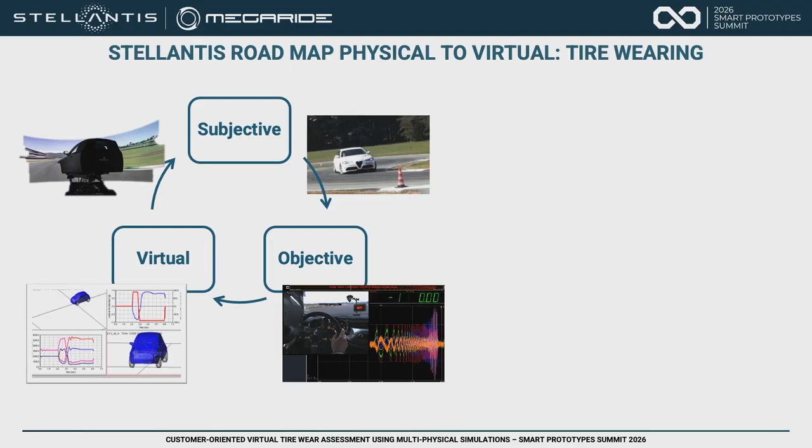And just yesterday, Andrea presented the integration of the hardware in the loop of the shock absorber on the simulator that, as far as we know, is the first worldwide application of this technology. And we are proceeding in this direction. What we are presenting today is something that apparently can seem very basic, but in reality, it isn't. We are talking regarding tire wear.

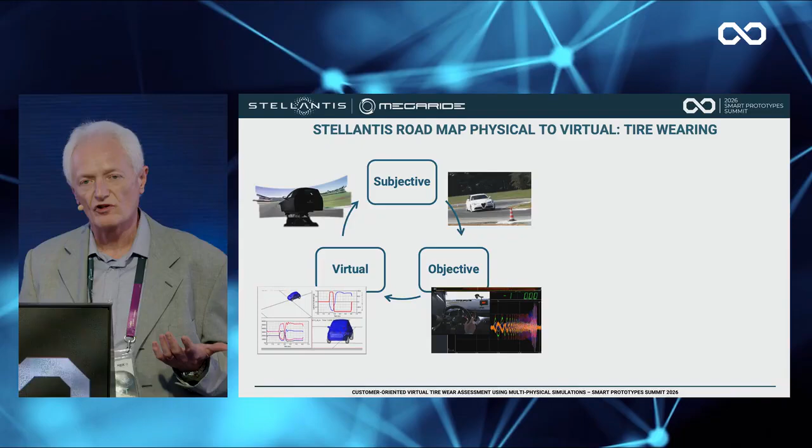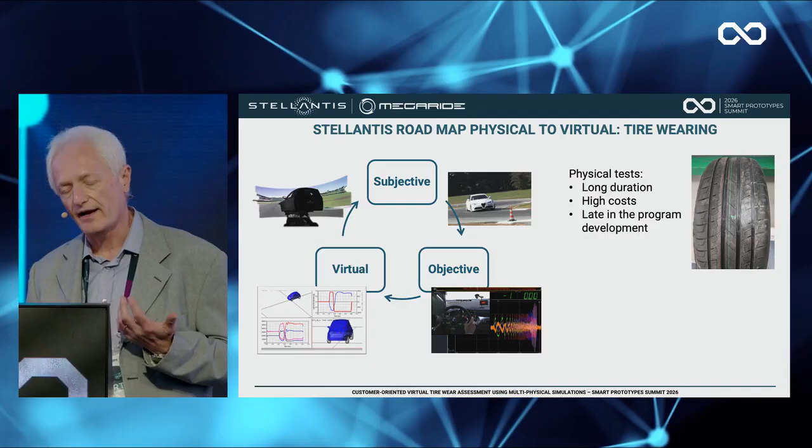The tire wear approach in Stellantis, but also in many OEMs, is to delegate a lot to the supplier, defining the target, and making a final check at the end of the development. This usually works, but we have had some issues recently, especially with some newcomer suppliers. And so we are evaluating changing something in order to introduce intermediate checks. But unfortunately, it's not possible to use what we do at the end in intermediate checks because it has a long duration, has high cost, and then it becomes complex.

Then what we are trying to do, what we are investigating, is to use something that is simpler, but lets us make an early prediction of the tire wear using a smart procedure, even if we are conscious that this has a reasonable precision. What we mean as reasonable, just to give an idea, is something around 10–15% of relative precision with respect to a reference tire, so in a relative way.

We started an investigation with several potential partners, and we identified in MegaRide an approach that potentially can fit our expectations very well. And then we started a proof of concept project with Flavio's team.

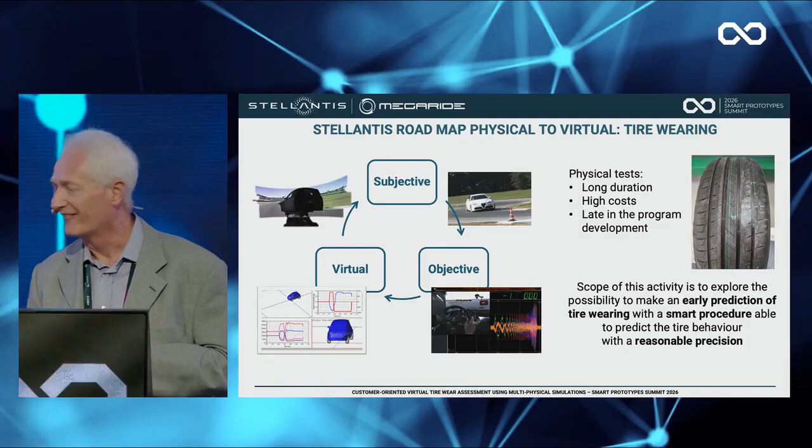Just a few words about who we are. Stellantis does not need a specific introduction. Maybe we do. We are, first of all, a research group at the University of Naples. We have worked for about 15 years in vehicle dynamics. In 2016, we founded our first company, MegaRide. Then we acquired a second one, and then a few other startups were born within the group. So now we are 4 companies. We involve about 60 people, with 18 PhDs funded within the companies.

And we were born with motorsport, so we work within 13 racing series with more than 35 racing teams. But we are expanding this kind of technological platform to OEMs and tire manufacturers, which nowadays use these kinds of methodologies. Today, we are going to introduce how we applied some of the tools we developed within this case study.

Our platform is called Ride Suite. It's a multi-physical and modular platform regarding tire simulations. It has a thermal module, ThermoRide, a multi-contact module, ThreeDeeRide, an advanced MF-EVO interaction module, and the wear module, the first commercial wear and degradation module, WeaRide. Each user can select which module he wants to use within his daily activities.

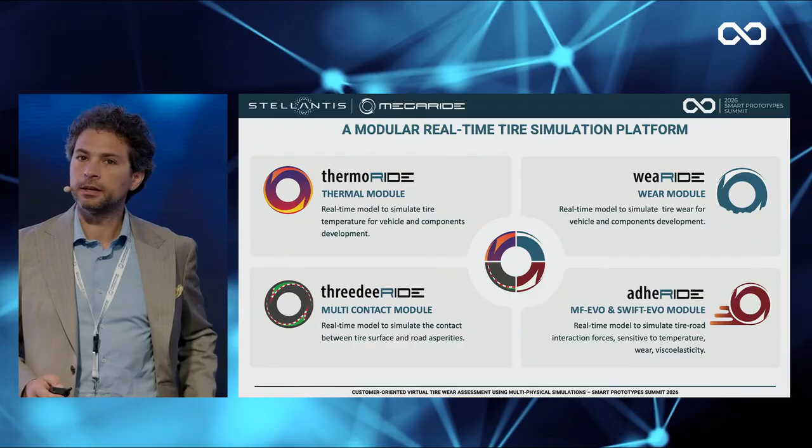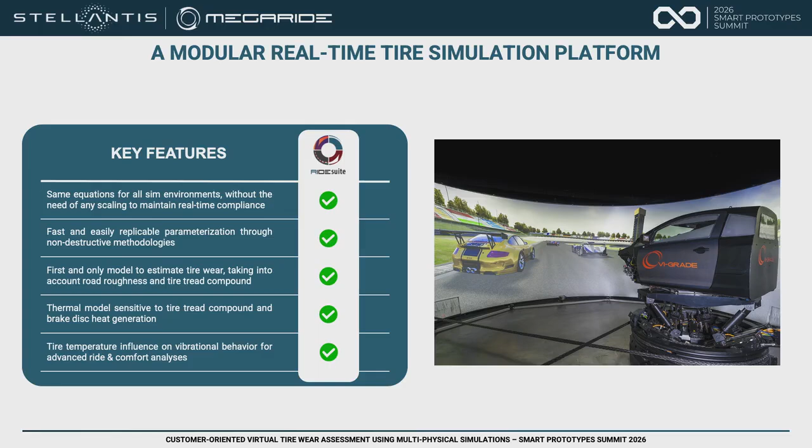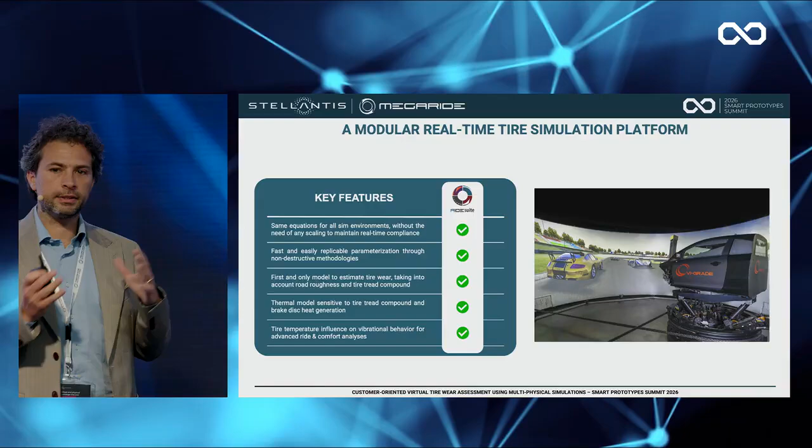The key feature and the peculiarity of our approach is that we want to be smart. We were born with motorsport. Our characteristic is that our models have to be parameterized and calibrated in a smart way. So we are perfectly fitting the event we are presenting today. And we want to be something different because with simple and non-destructive tests, you must be able to parameterize your own simulations with always the same analytical formulation within each of these models. And you can use them both in desktop and DIL applications.

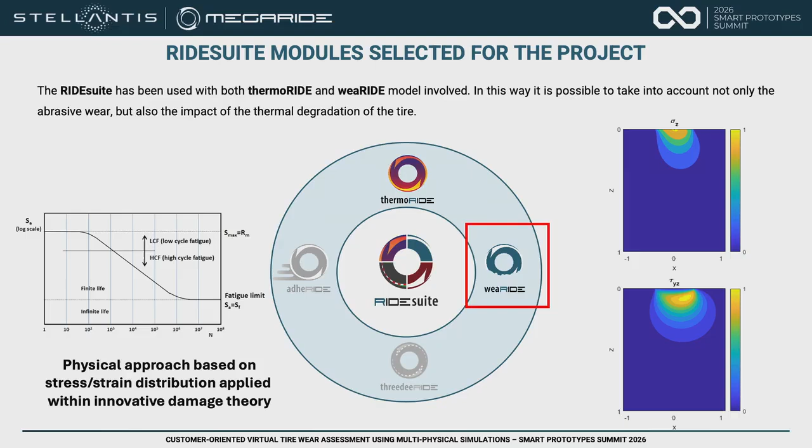Today, for this specific project, we will introduce a couple of modules we selected for this target: the thermal module, ThermoRide, and the wear module, WeaRide. This one, as said, is the first commercial wear and degradation tire model. It was awarded the Vehicle Dynamics International Award in 2024, and it's based on an advanced physical approach which is linked to the stress-strain distribution within the tread blocks linked to the damage theory. So we developed the stress-strain formulation within the tread block, and we apply this to the damage factor, which lap by lap and kilometer by kilometer accumulates the damage within the tire itself.

The key features of this model are that everything has to be parameterized with completely non-destructive testing. Road roughness plays a very deep role, as we know, in wear and degradation, and we have some proprietary applications to develop this kind of analysis.

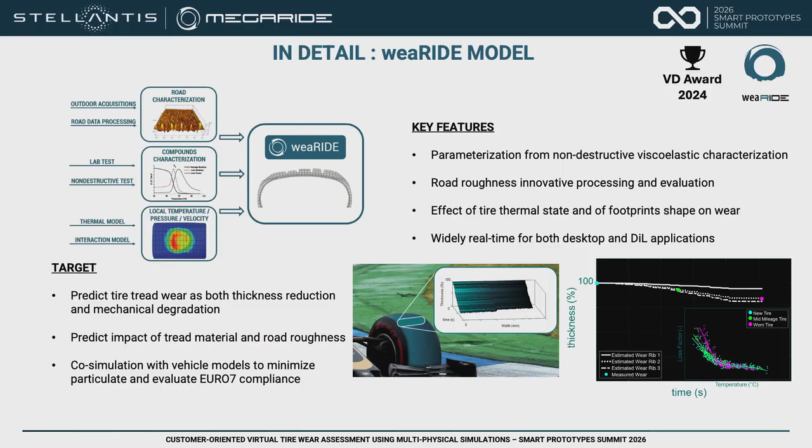And we see how thermal modulus and footprint shapes act within the wear and degradation effects and factors. The target of the model is to have a tire tread wear as applied both in the mechanical degradation and the progressive tread thickness reduction. And this model is linked to road roughness and thermal applications.

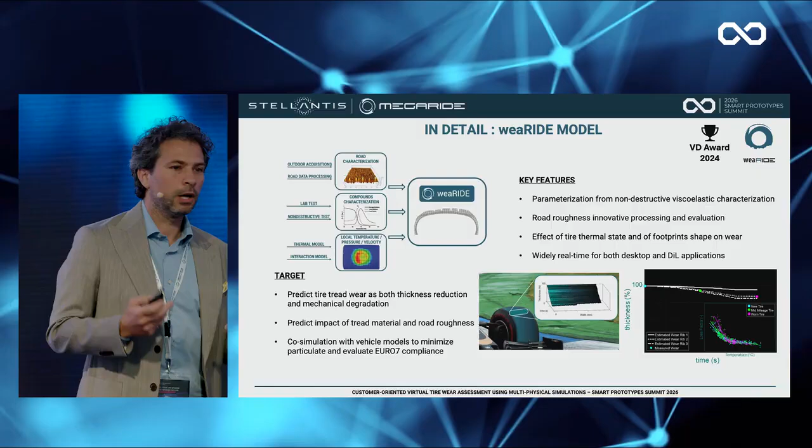This is, in our opinion, very important also with the paradigm shift which is coming in our lives linked to Euro 7 regulations. And so probably in a few months or years, we will be here talking about what Euro 7 is going to mean for all of us.

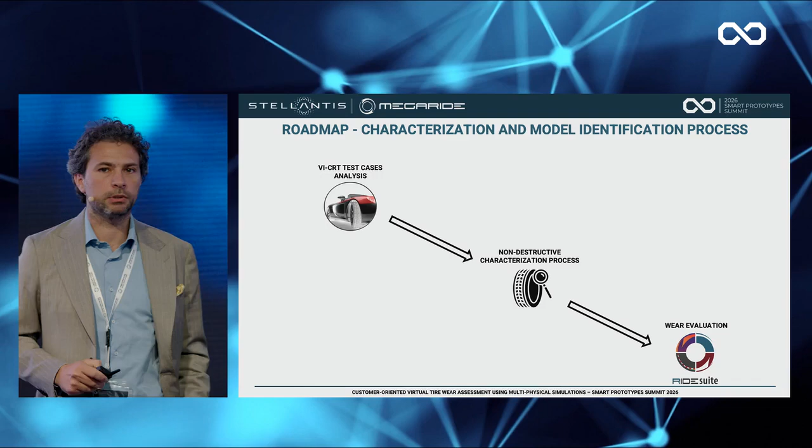The roadmap and the pipeline of the activity was based on VI-CarRealTime simulations at the beginning with a validated model by Stellantis. In parallel, our group developed the parameterization and the non-destructive test of the tire itself, and finally we ran our simulations with the RIDEsuite modules. Silvio will explain in a minute how they did the job on the vehicle model and on the road missions linked to the wear test.

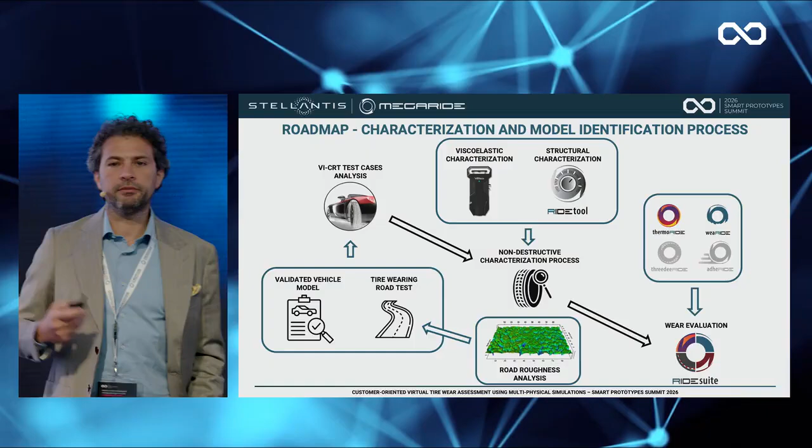We will explain how we developed the viscoelastic characterization and structural characterization of the tire and the road roughness analysis from the mission and the path the activity developed. And finally, we will run some of the results of the activity.

Please, Silvio. Sorry, back. Oh, yes.

Then let's start with the activity. Consider that all this activity started in December. So we are not talking of something done 1 year ago, but in a short time, really in a short time. First step was the definition of the test case, considering two boundary conditions. We wanted to select something that we had available. So we selected from the library of tests that we have performed recently on the road.

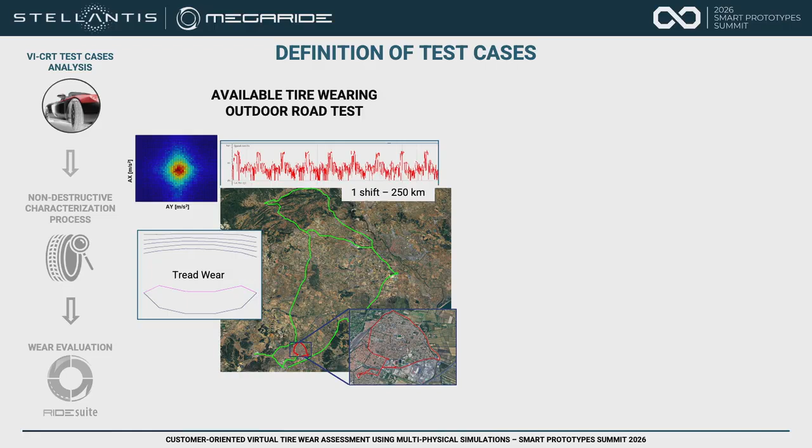Second condition, to have the availability of the model. This is not a big issue because we have a full coverage of the virtual model on our portfolio. Sometimes the problem is to have the measurement, because we measure the basic configuration of the vehicle and all the variants are in virtual. In this case, we preferred to have something that was also measured.

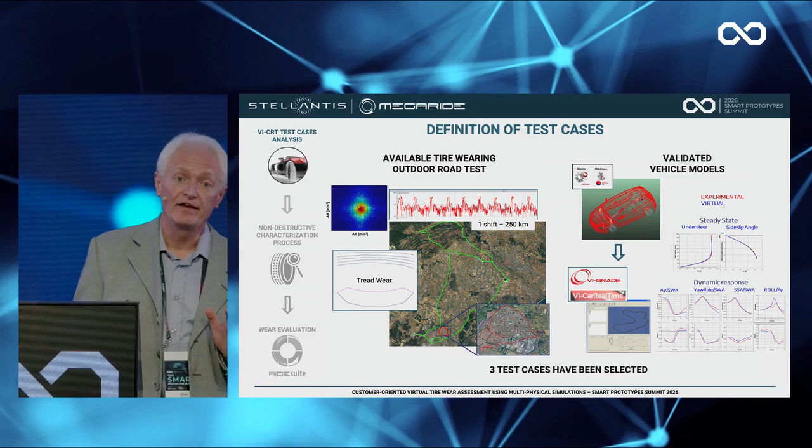Then the model that we had in multi-body environment was fully validated in static and dynamic condition, and we extracted the input to build the VI-CarRealTime model that we intend to use to run the simulation. In this way, we selected 3 test cases to apply the methodology.

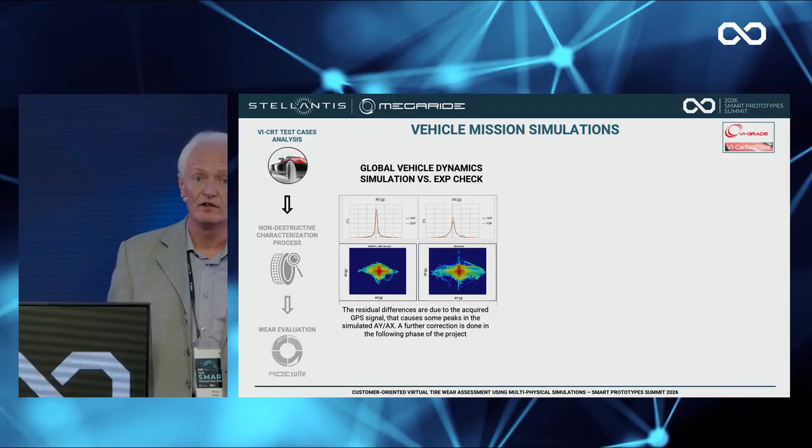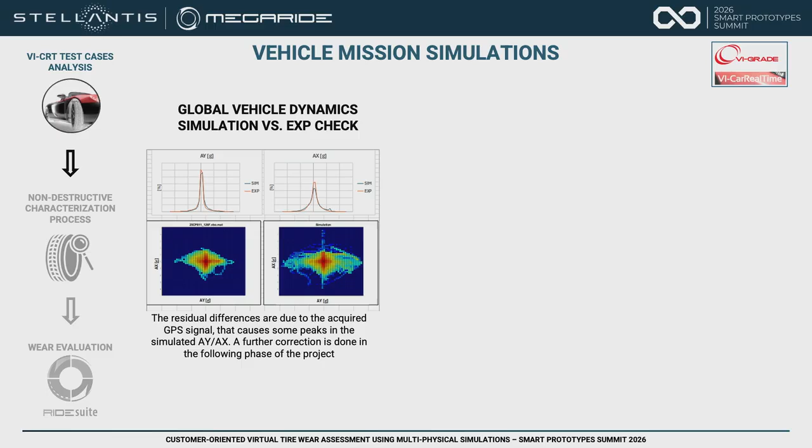First step was to make the simulation, using the real GPS data coming from the test to reproduce in virtual a 1 day driving cycle, a total of 250 kilometers, roughly. It worked quite well. We had just some issues related to GPS incoherence in some parts, and we needed to perform some correction, but in general, it was a good reproduction of the lateral and longitudinal acceleration, and this led to build the panel of information needed for the following step of the methodology.

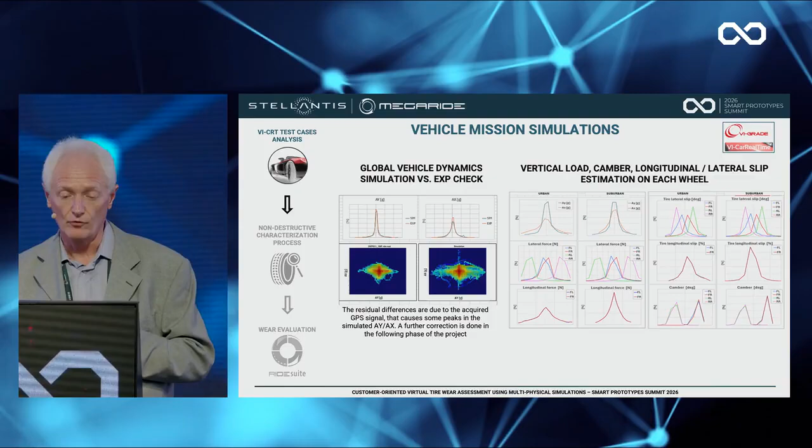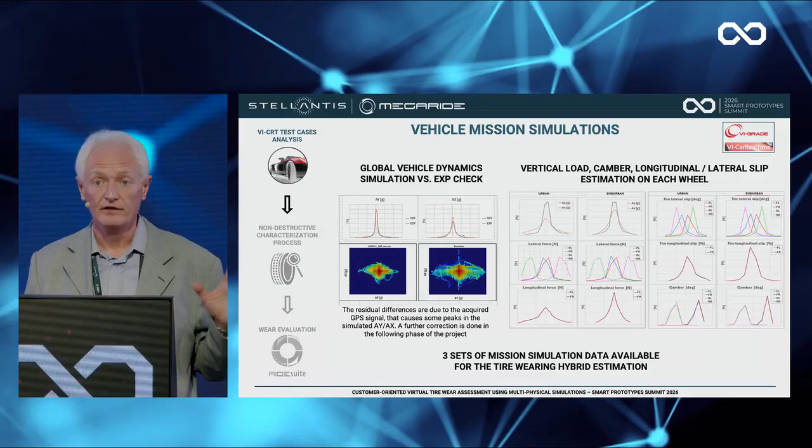Then vertical load, camber, longitudinal and lateral slip in each of the wheels. This was the set of data that we passed to start the tire wearing simulation. We are fully aware that in the future, these two phases can be merged, having the wearing simulation embedded in CarRealTime simulation. In this proof of concept, we decided to divide it into 2 parts, but this was just in order to speed up and divide the responsibility between our 2 companies.

Thanks. And so, in the meanwhile, our friends in Stellantis were developing the vehicle simulations. We were doing our job on the tire. The first thing to do was characterizing the viscoelasticity of the tread of the tire. We developed a few years ago for motorsport this technology called VESevo. You can have a demo at our booth in the expo area.

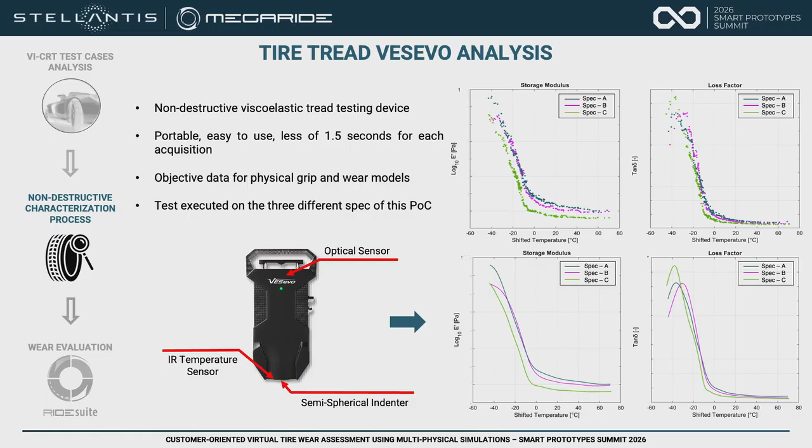It's a device which is able, in a very fast and non-destructive way, with a very simple test, to get the global assessment of the tire viscoelasticity characterization, which means the storage modulus and the loss factor. It's a sort of portable DMA machine.

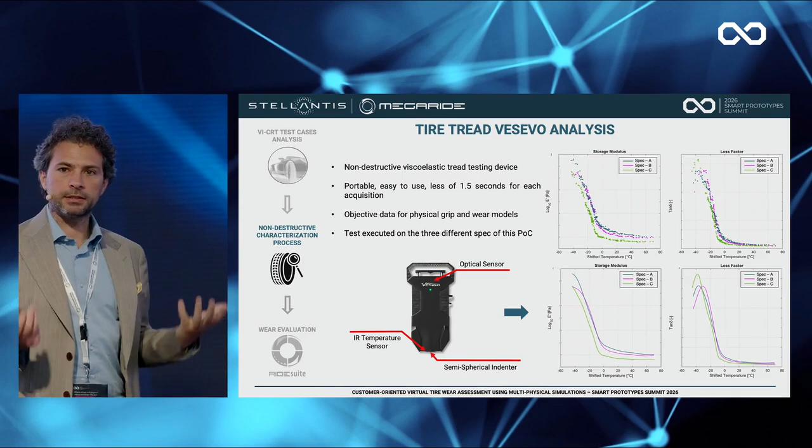For the activity, the 3 tire specs were characterized, and as you can see, spec A, B, and C provided very different and interesting characteristics in terms of the elastic and viscous behavior of the tires themselves. In parallel, we did the job regarding the tire footprints. So at our lab, we developed this, once again, non-destructive test concerning tires.

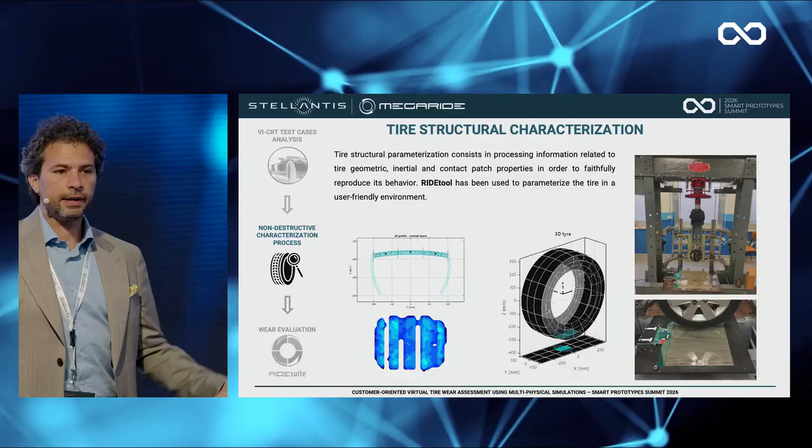So with our press and with this pressure-sensitive carpet by Tekscan, we are able to provide the footprint shapes of the tire under different camber angle, vertical load, and inflation pressure characteristics, because the area of the footprint, of course, is the area through which the energies linked to the wear model pass.

Third part, very important, was linked to the road roughness characterizations. In this project, we got the data about the geographical area where the missions had been carried out from our historical database, because in MegaRide we have several different road roughness scans from all around the world.

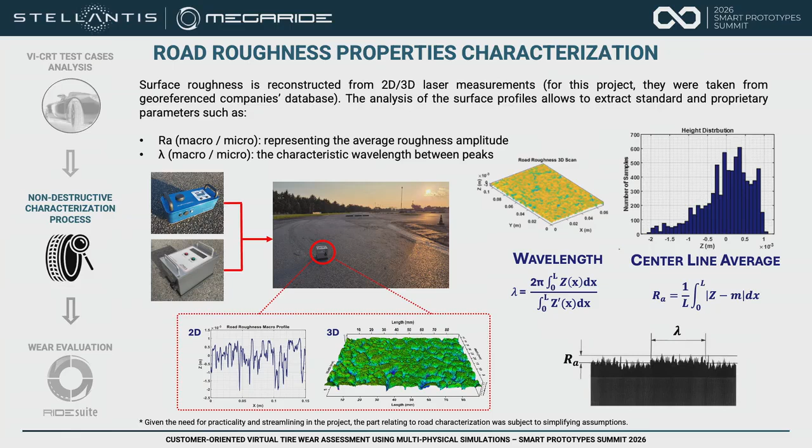But in general, our group in the last year, thanks to experiences in motorsport, were able to get proprietary evaluation and methodologies to get information from 2D or 3D road profiles and to get important KPIs which are deeply linked to friction, grip evaluation, and of course, wear and degradation phenomena.

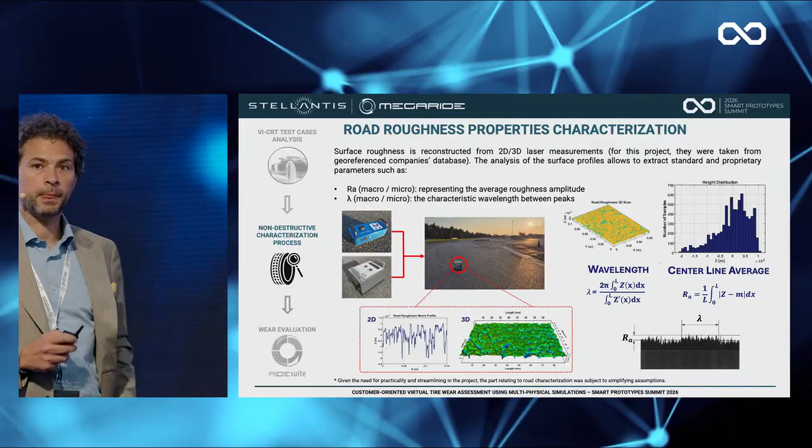Coming to the results. On the left side, you will see the results of the experimental campaign which Silvio showed you at the beginning. So 3 actual cars with 3 different actual tire sets run in a specific mission on a certain route. On the right side, you see the 4 tires for the 4 corners for the 3 specs.

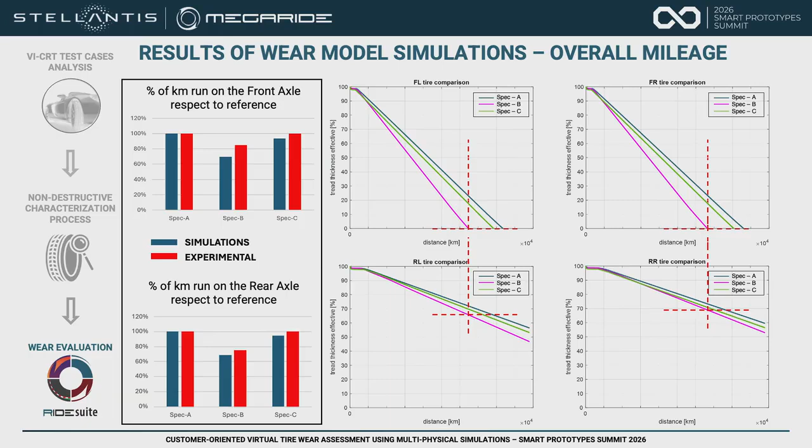Actually, the simulations by VI-CarRealTime were able to predict the fact that the spec B was the one which reached before the other ones the legal limit for which the front axle is at the limit of its predicted wear expectation. The rear axle, so in the below area of the diagram, had less wear, and so it was confirmed also by the experimental data you see on the left side.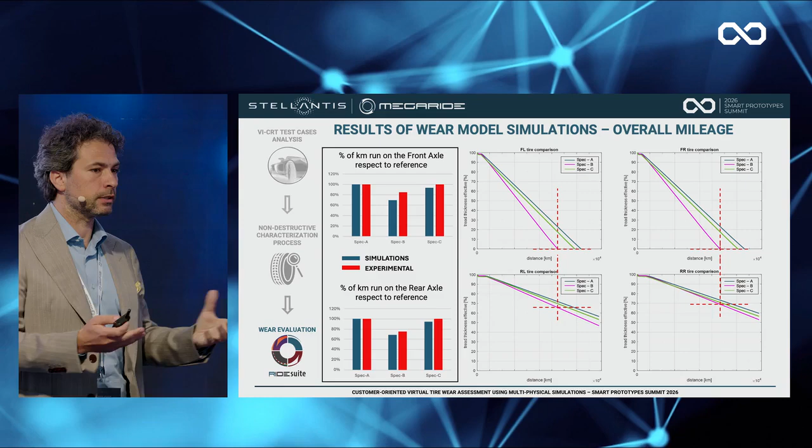So we have that the B spec was worse than the C spec, than the A1, and A and C were quite similar. So it's a predictive and preliminary assessment of the tire suppliers before eventually the actual outdoor runs. The model is able also to work in local.

So the model was able to predict on the width of the tire which was the shape of the wear profile. And we once again got the fact that the most worn tire, so the spec B, had this kind of shape of the tread. And what does it mean?

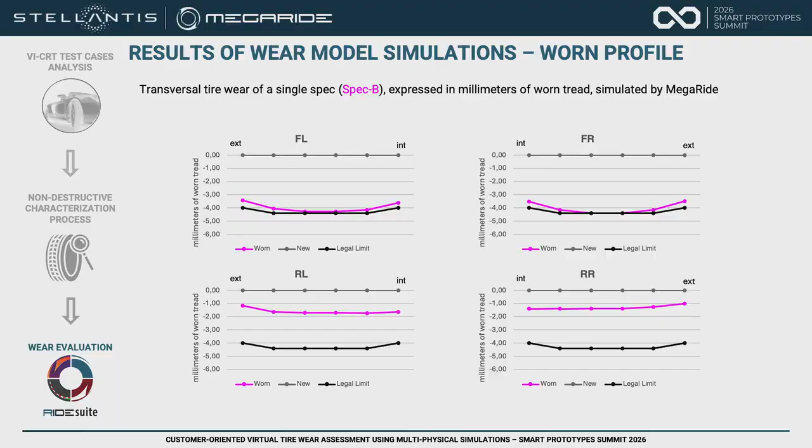In this kind of missions and routes, the wear and degradation phenomena were linked to rolling phenomena and not much to handling ones. And so for this reason, the most worn area is the area at the center of the tread, because of course we are wearing the center part of the tread itself. And once again, it's confirmed the fact that front axle was wearing more than the rear one. So the model was able to catch also this kind of results.

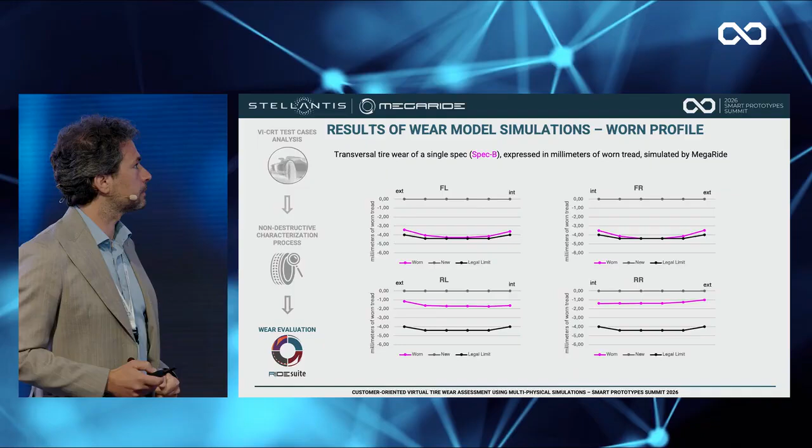After this quick analysis, I would leave to Silvio the conclusions about the study. Yes. At the end, I don't repeat the scope of the activity. I think it was quite clear. And focusing on the results, the approach sounds very promising, can catch well our needs.

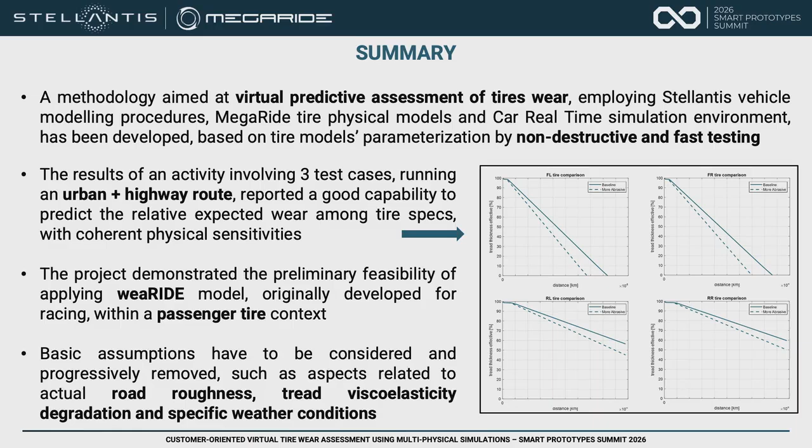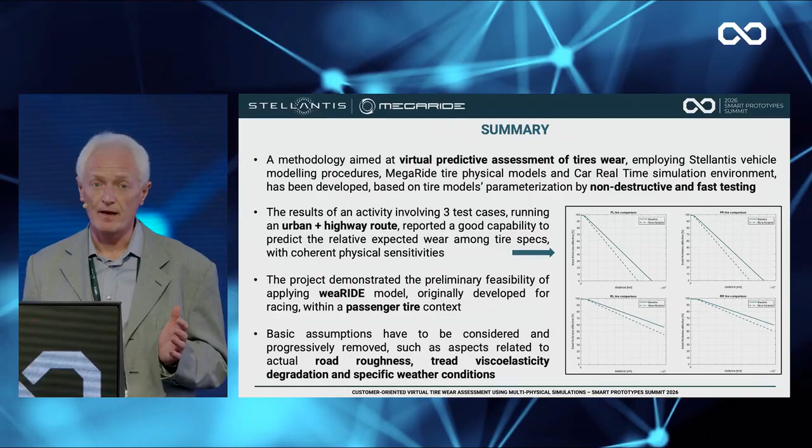We know that we have some aspects that we still need to work, and this can be done in 2 directions, to work in the way of the simulation or to change some of the assumptions that we had, introducing a little more complication in our approach, such as, for example, characterization of the road roughness, tread viscoelasticity degradation during the test, and other points that Flavio can explain better than us.

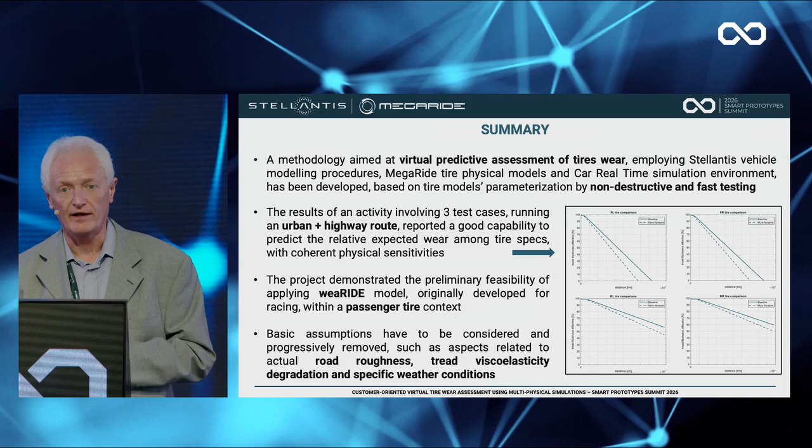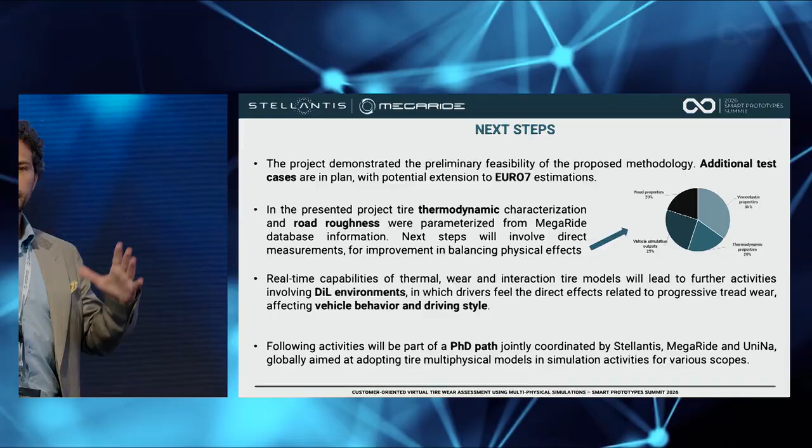But in general terms, the proof of concept was positive, the approach is very promising, and we intend to proceed in this direction according to the next step. Please, Flavio. Yeah, so this project was really nice. We were really encouraged by the results. And as said, we think that these kind of things could lead us towards what's going to happen within the Euro 7 big wave, which is going to come on us.

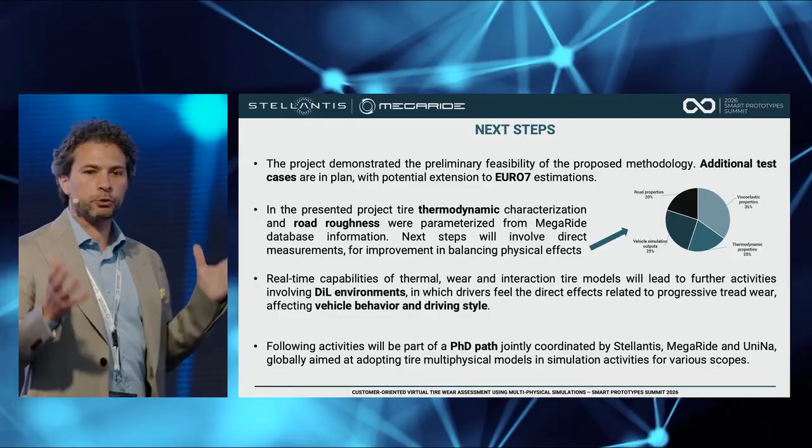In this project, the thermal characterization and road roughness, as Silvio was saying, were a little bit simplified. We will have probably a second step of the proof of concept in which the road roughness and thermodynamics will be actually characterized on the actual tires and on the actual route.

All what we did in desktop simulations will be soon on the DIL in Stellantis, and you can also try the same technologies at the DIM 400 session, which is here, or on the driving simulator we have here at our expo area together with Meccanica 42, in which you will feel thermal dynamics, multi-contact dynamics, and wear dynamics.

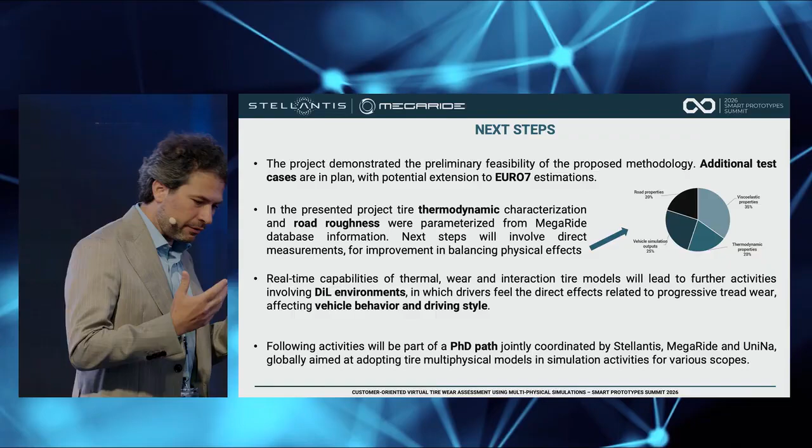And finally, all the activities will be within a PhD path jointly coordinated by Stellantis, MegaRide, and UniNa, in which we aim to adopt this multiphysics within simulation activities for several different scopes.